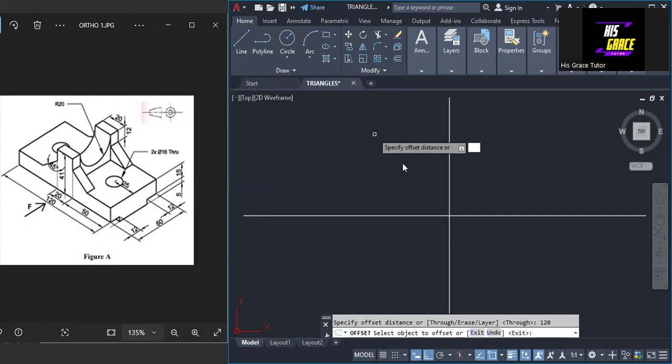So we offset it to a distance of 120 millimeters, taking it from here to this side. I need to extend this line. All right, so we have it here now.

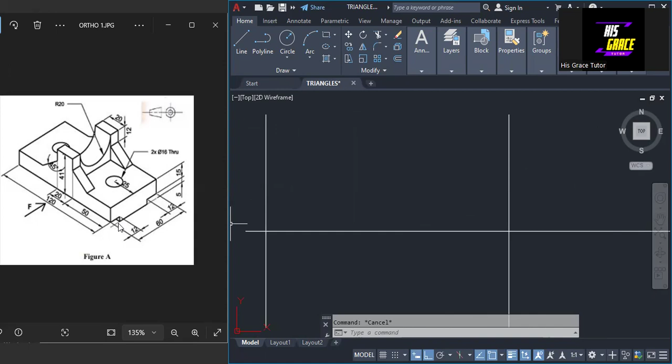Looking at this object, we have a shape down here, with a distance from here to here of 5, as shown here. So I'm going to offset this line to a distance of 5.

And then from here to here is 15, so I'll repeat that offset and give it a distance of 15. So from here, we have that 15.

Next, we need to know the midpoint of this object so that we can draw this rectangle here, and then this slant side. So we need to know the midpoint.

For the midpoint, 120 divided by 2 is 60. So I'll repeat that offset and give it a distance of 60, taking it from here.

So that's 60. Then the distance from here to here is 20, so I'll repeat that offset... sorry, that would be 10. I'll give it a distance of 10, taking it 10 to the left side and 10 to the right side. So we have this now.

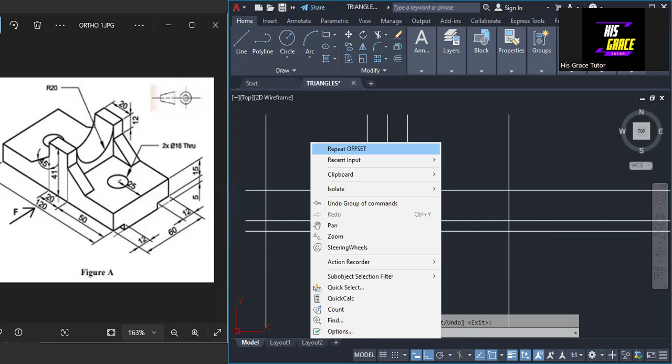Total distance from here down to this point is 41. So I'm going to take that 41 to obtain this line, offsetting this particular line up to a distance of 41. So that is that 41.

Then the next thing I'm going to do is take this line down to a distance of 12. So I'll offset it now to a distance of 12, taking this particular line down. So that's what we have there.

Now I can go and draw this line and this line, which are at an angle of 45 degrees to the vertical line. So how do we do that?

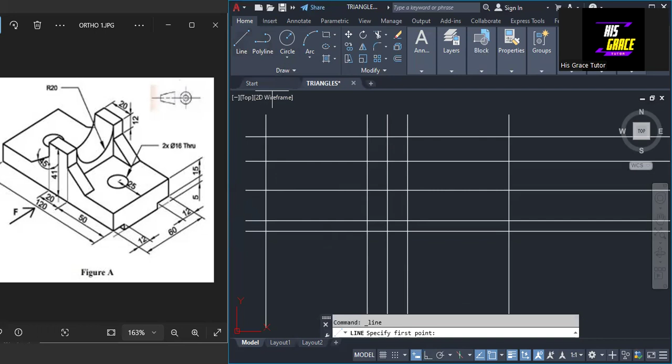I'll put off the ortho mode and then take the line, drawing from here. 45 from 180 will give us around 135.

So I'm going to input an angle: press the tab key on the keyboard and give it 135, then press the enter key. So that's it, we have the line.

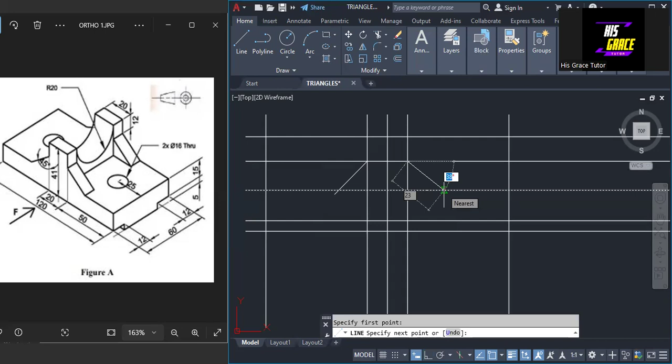Then we also have it on this side, so I'll repeat the line. From here, this will give us 45 straight, so just press the tab key on the keyboard and give it an angle of 45. So that's it, then we trim the excess lines.

So we trim the excess lines, and we have it like that.

Other things that we have here: I'm going to delete some lines that I do not need. So let me quickly do that. We still have this to trim.

So I will trim this off, trim this, and this also. I don't need this line, I don't need this line, so I'll trim this off. I just want us to have what we need as the front elevation, so this should be trimmed off.

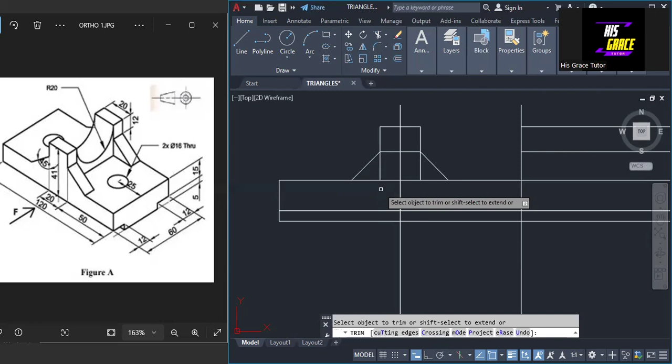Let's trim this off, including this line, including the center line, which I'm going to remove.

I'll remove the center line.

So this line that we have here, for this semicircle in the front elevation, it should be hidden, and the radius is 20. So it's going to be hidden from us in the front elevation. What I'm going to do is offset this line to a distance of 20 down.

So we have it here. Another thing we are going to do: we have this particular line here, and it's going to be hidden from us in the front elevation. What I'm going to do is break off this line, because this line, as we see it here, is going to be hidden in the front elevation. So I need to break off this line up to this point here, including this.

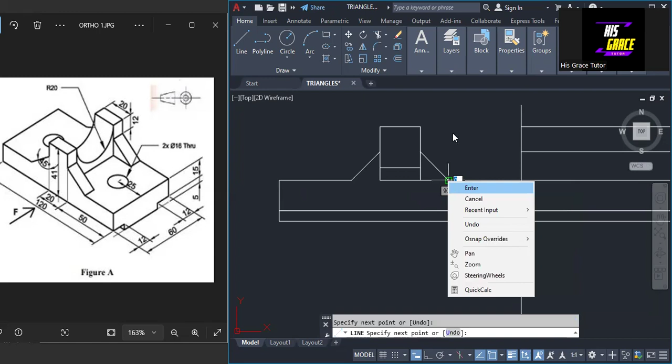So let me leave this line. I'm going to redraw the lines. The reason why I did that is for me to be able to make them short dashes line. Then I'm going to draw this, and I will also draw this one. So we have that now.

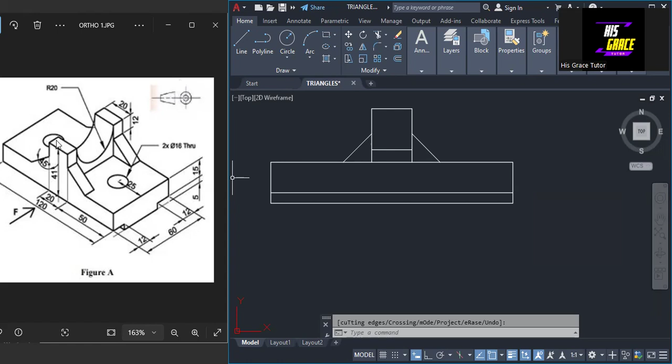Another thing I'm going to do here is break this line, so I just want us to have the front elevation alone. That is what I want us to have here. So for the front elevation, we have this hole, and we also have this hole, which should also be hidden from us in the front elevation. The distance from here to the center is 25.

So I have to offset this line to a distance of 25. I will take it from here, and then I will also take the distance of 25 on this side. Then I'm going to extend this, and extend it down. Let me put on the ortho mode.

This line is not really vertical. I'm going to delete this line and set it again, to 25. Then I'm going to extend, take it up and bring it down. These are center lines, so that's why I did that.

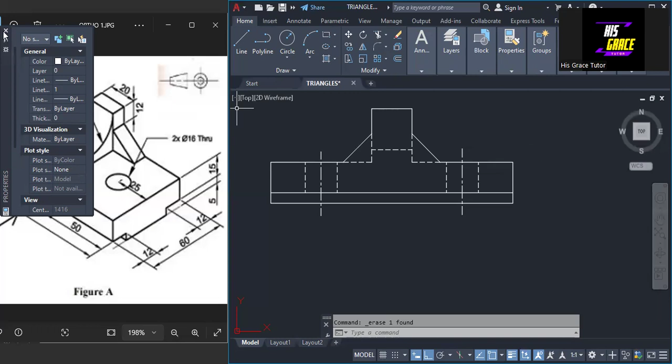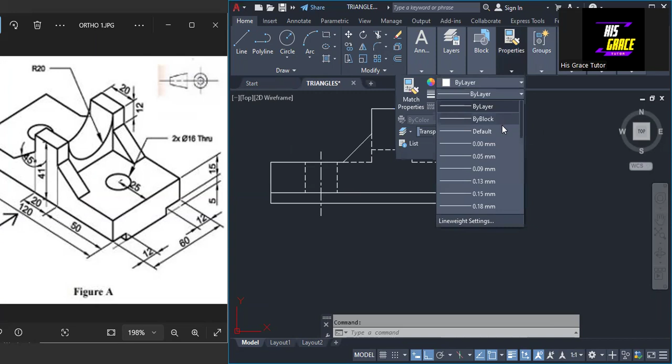So we have it there. I'll deselect this, and take this line off so we can't see it. Here is the front elevation as we are given. Next thing I'm going to do is make these lines thick lines, including this one, then set the center line.

So then we come here and change this. Here we have the front elevation. This line here, I just need to match this. So I have the front elevation in place. I want to write front elevation here, making the height 3, rotation angle 0, and I'm going to write here: this is front elevation.

Let me just shift this a little bit to this point here. So here we have the front elevation of the objects, as simple as I've done it here. All you have to do is practice, and when you practice, you become a master at it.